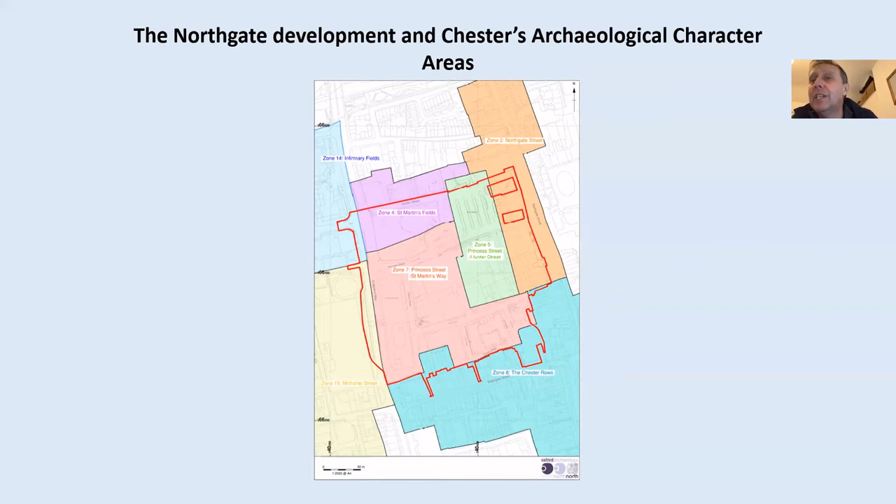They may not be scheduled, but planning guidance says that where you've got remains of national significance, there really is a need to treat them in the same way that you would as if they were scheduled. Okay, if that makes sense. So that's a justification, if you like, for the whole approach that we've taken of preservation in situ. Could we move on to the next slide, please?

Helpful, I think, to just remind ourselves of what we might be encountering in the area that was to be disturbed. Again, we're only just dealing with the northern area here. But thank you to Peter at the start for providing that summary of what had been found in the past with regard to work in the earlier part of the 20th century, and then Tim Strickland's investigations in the late 70s, early 80s on the site of the bus station.

We are, of course, looking at the Roman legionary fortress here, and we're to the north of the elliptical building, and you can see the barrack blocks in the western part of the area, and then in the eastern area, that probable stores building that was identified. So that's just a brief outline of the Roman picture.

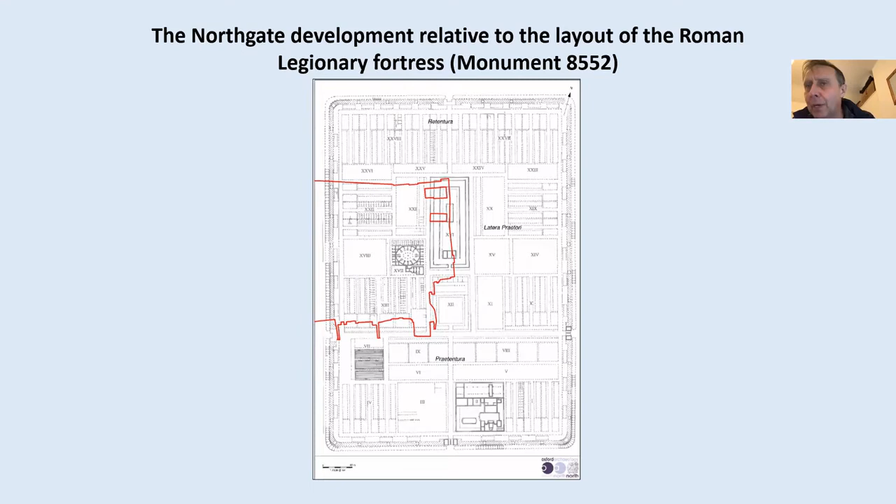If we move on to the next one, we shouldn't, of course, neglect the later periods, and we were alert to the possibility of early medieval finds, not least because of the discovery of the sunken featured building during the late 70s, early 80s excavations, published by Simon Ward in his volume. So that's the northern notation on that plan, basically. Next one, please.

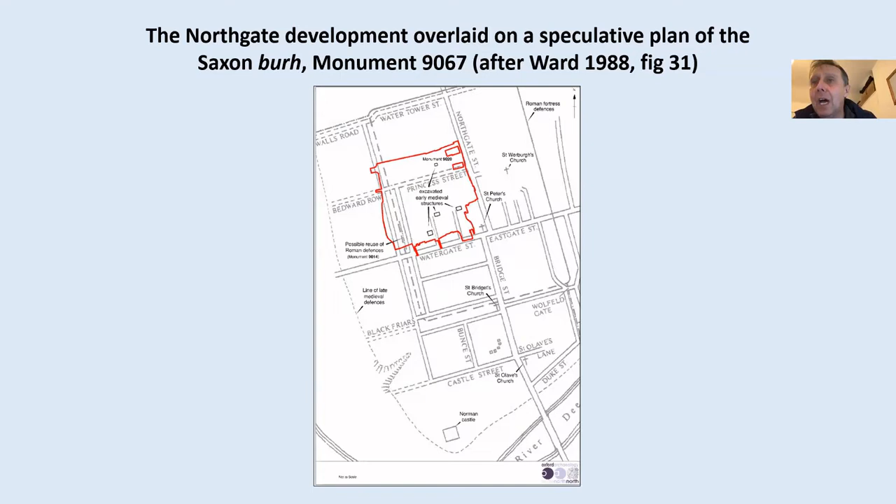Then again, with medieval Chester, the lanes, well, there's no Hunter Street at that time, but of course Parsons Lane, I think now Princess Street, Northgate, and what today is Nicholas Street are apparent. The area beyond that looks quite open, and I think that's reinforced by the next slide, please.

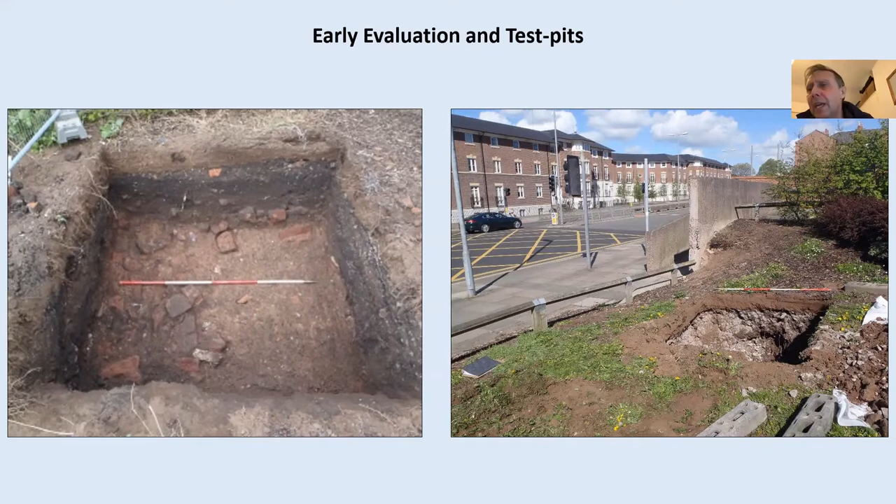So if we could move on to the next one, please. Okay, at this early stage, we also took advantage of the various geotechnical works that were carried out. So these weren't really formal evaluation trenches, although they were subject to close evaluation, close observation by the Oxford Archaeology staff. And these two slides illustrate the sort of thing that we were interested in.

So the one on the left with the ranging rod in it is a hole that I asked to be punched through the concrete floor or surface of the existing bus station. Because one of the questions that I had, coming new to the project, basically, because before I became development management archaeologist for CWaC, I hadn't dealt with Chester at all, really. And I had various questions that might or might not be, in retrospect, sensible or obvious to anybody with any knowledge of Chester.

But anyway, this one on the left made me quite unpopular with the contractors, because not only did they have to get through 500 mil of reinforced concrete, there was also this layer of aggregate underneath it. But what I was keen to understand there was what had been done at the conclusion of Tim Strickland's excavations. Had they taken a bulldozer to everything and just graded it all before putting in the bus station, or had they just covered it all in topsoil, in which case all those archaeological remains would remain, the stone walls anyway, the Roman buildings would probably be there, really.

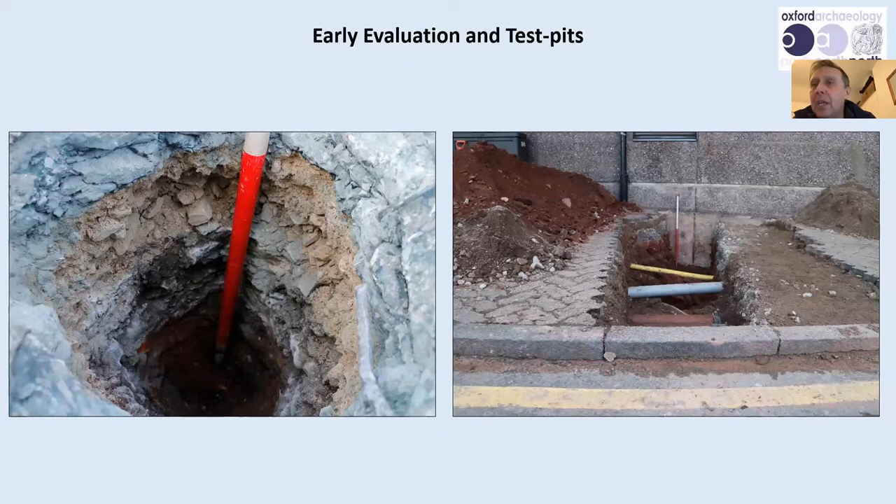Could we move on to the next one, please? And again, more test pit watching briefs, basically. I put the one in on the left because that was just a small trench, which didn't tell us a huge amount, but it actually officially marked the start of the Northgate development. So people may remember there was a bit of a press fanfare there, basically. But also, test pits were dug down Hunter Street.

Now, these were dug not because this part of Hunter Street was going to be massively disturbed by the development per se, but because it was going to be affected by the need to realign the services. And what we wanted to understand was the damage that those services were likely to do to the underlying archaeology, and if possible, to minimise it. The aim being, as we've eventually decided, and as we'll see shortly, to put as many of the services in one trench of restricted width and hopefully depth, so that we minimise the damage to the archaeology.

And I think that was a good and innovative thing to do, because, as I said earlier, this is permitted development which the utility companies can put in, but credit to the CWaC construction team in that they said, well, actually, we accept that it's because of this development that these services are going to go in. So we will include those as part of the mitigation, rather than just leaving it to a bolt-on at the end of the development.

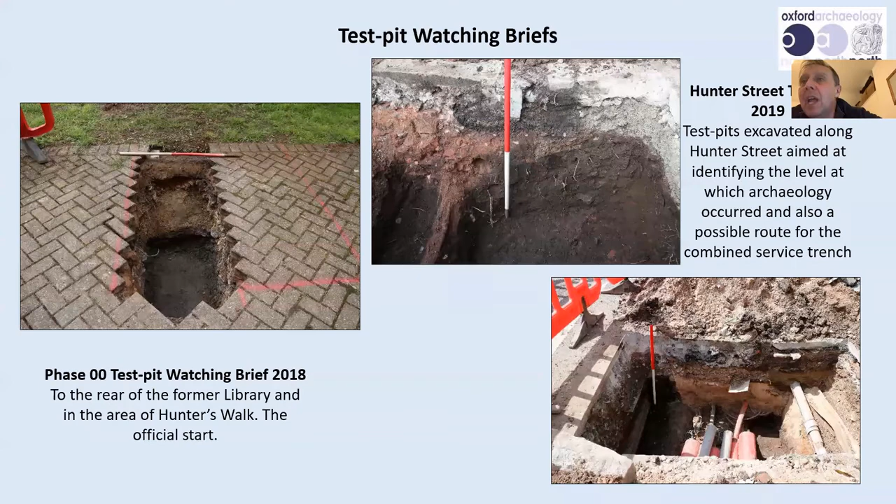Okay, so this picture is just to give you some idea of where trenching was done. So many of those green trenches, it certainly doesn't show all the geotechnical pits that we observed and everything, but this is the evaluation trenching, much of which was carried out specifically in connection with the latest iteration of the scheme. And as you can see, it's been quite extensive, really, although it's worth saying that the aim was to find the top of significant archaeology, which in this case tended to be the Roman collapse layer.

That's not to say that we would have ignored anything else. If we'd hit anything later, early medieval that had been well preserved, we would have stopped there, and the preservation in situ strategy would have had to take account of that. But in this instance, all of these trenches were cut to the top of significant archaeology, which tended to be the Roman demolition, or the natural in some instances where the archaeology tended not to survive, or where there had been significant recent damage to the archaeology. So quite an extensive area.

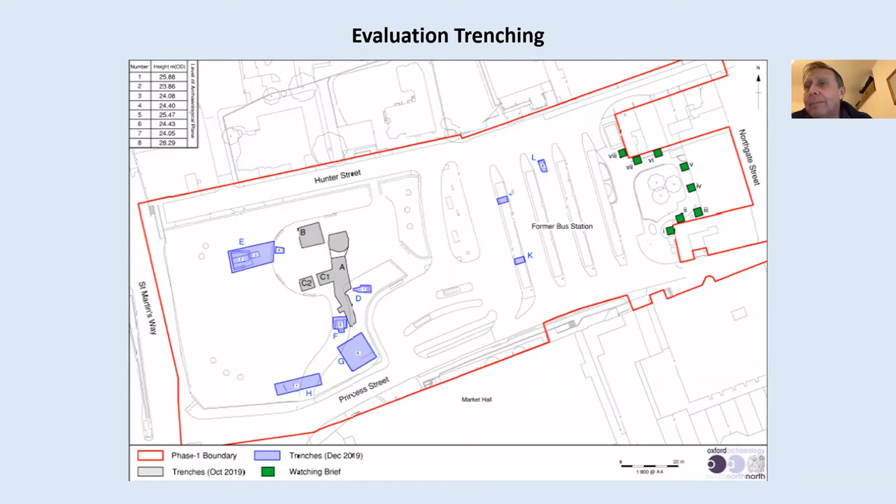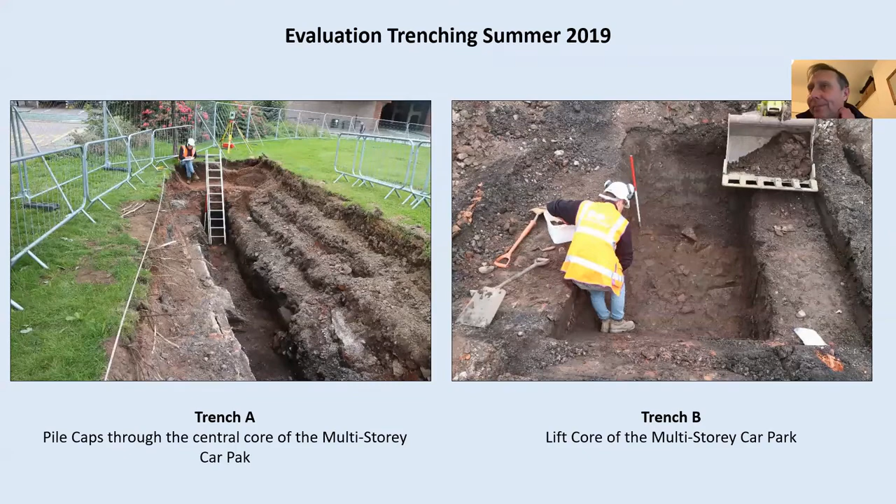Okay, so again, more trenching. Trench A is a further one for another array of pile caps, towards the west end of Princess Street. Lots and lots of services, and in this area it's all quite difficult, collapsing stuff, because we're dealing with backfilled cellars here from the 18th, 19th century buildings that formerly lined the north side of Princess Street.

Interestingly, the other trench, a bigger trench that was opened up within the car park area, sorry, the bus station area. You can see that dreadful reinforced concrete they had to get through and the aggregate underneath, then the deep brown soil, and then again a wall on the right-hand side, which we think is of Roman date.

That was really conclusive proof that at the conclusion of the excavations in 1979-80 on the bus station, they didn't, fortunately, bulldoze the site. They just covered it all over with aggregate. We assume that what was there at the end of the excavation survives beneath what was the bus station surface. And I'm pleased to say it pretty well all survives today.

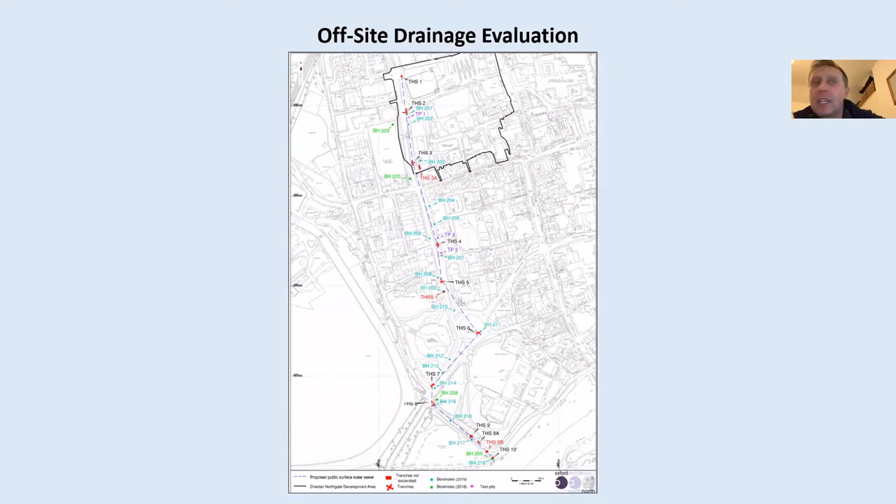As part of that off-site drainage, which again we need to remember is permitted development, we did some evaluation trenches in the Hunter Street area and elsewhere along its line, just to see what we were likely to encounter. At the west end of Hunter Street, you can see this red area just under the modern tarmac. We were particularly interested in that because there had been suggestions in the past that that might be a Roman surface, very close to the surface.

But we were able to demonstrate conclusively that that wasn't the case, because that brown soil underneath it had post-medieval pottery in it. Having said that, it was clear that archaeology would be disturbed by the feeder trench for the main drain, which was going to run down Hunter Street. As you can see, these trenches did reveal some archaeology.

But anyway, if we could move on to the next slide, please.

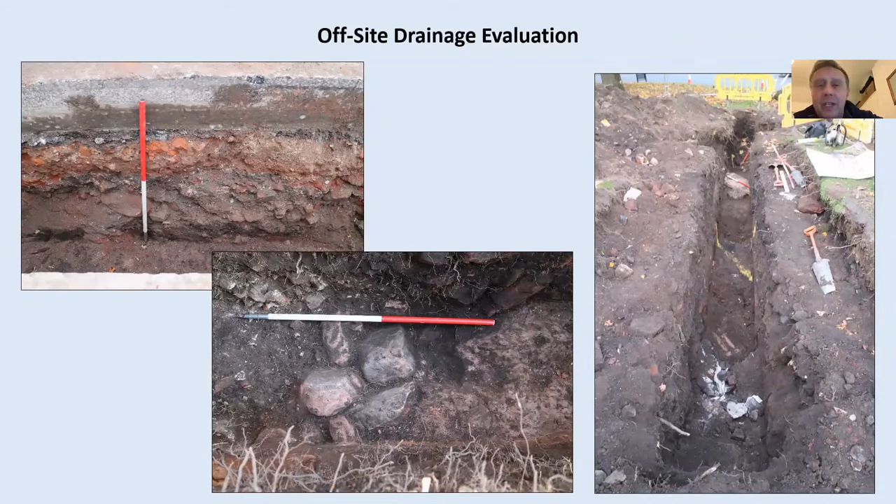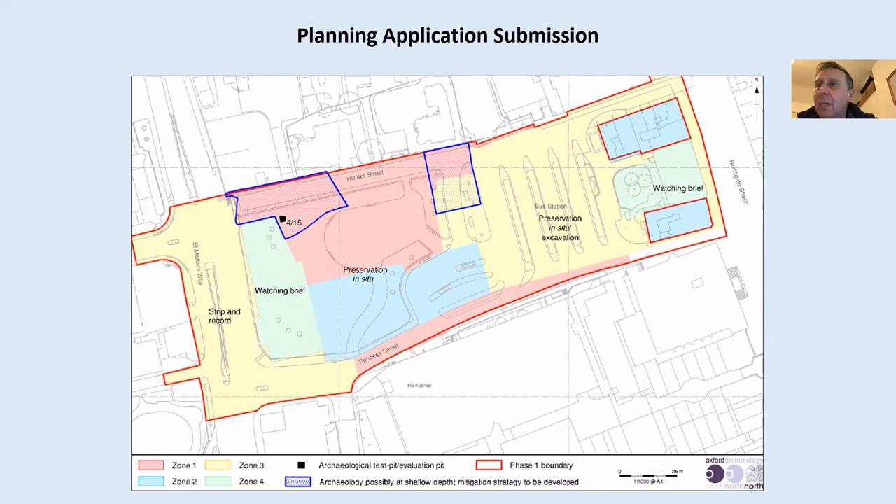We would then demonstrate that largely the concrete floors and underbase of the new development would be raised above that significant archaeology, except in a few places, such as I've mentioned before, where we had lift shafts or particularly deep piling arrays.

The calculations were done on that basis to show we couldn't quite get to 3%. Well, we didn't think we were going to get to 3%. As it turned out, we did manage to, but the projected loss of significant archaeology came in at 3.9%, which I think was pretty good, really, given the difficulties and constraints of putting this together.

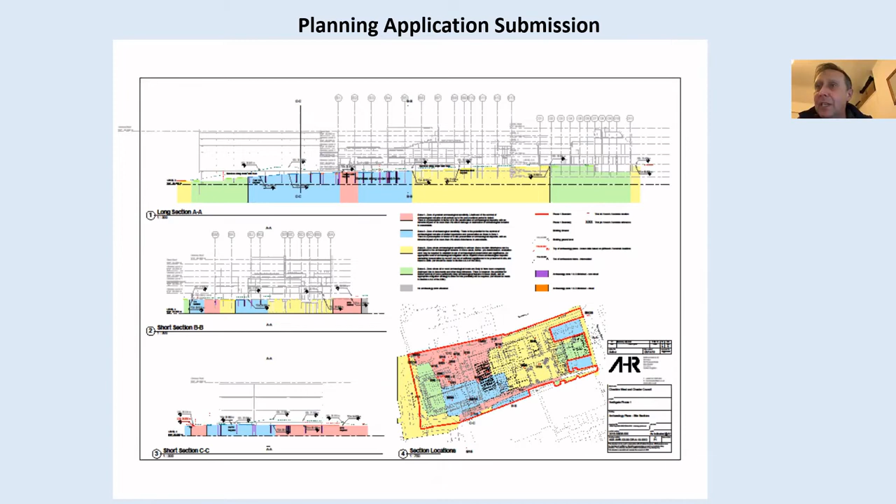In addition, Oxford Archaeology North, as the contractor, submitted generic written schemes of investigation, project designs for the different techniques, the written schemes for archaeological mitigation, watching briefs, strip and record, and archaeological excavation. So everybody knew not just where we were going to do these things, but how we were going to do them.

And also these things were all tied up when the planning application was determined. We weren't leaving this to be sorted out post-determination. The sensitivity of the archaeological deposits on the site was just so great that we didn't feel we could take that risk. It all had to be tied up and conditioned so that we all knew where we stood, and everything was backed up by stringent archaeological conditions.

And what we did is we met at two weekly intervals with Oxford Archaeology, the construction team, Vinci, and various other people to review how we were doing and to adjust the total loss of significant archaeology.

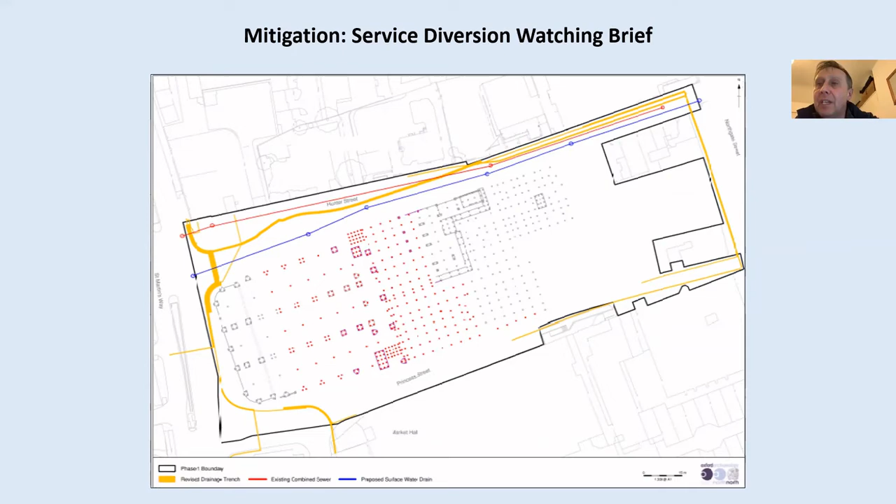The mitigation service diversion watching brief, this was where we were going to have the biggest impact. We recognised that as we went down Hunter Street. They made the trench narrower than they normally would, and we tried to plan it in such a way that it didn't unnecessarily go through archaeology. But there was some impact, as we will see. So if we just move to the next slide, please.

Some areas we only needed a watching brief. At the east end of Hunter Street, just outside the cinema, the area is massively cut about by services, but there were Roman deposits remaining, and those were plotted, and they seemed to tie in with the stores building that was excavated by Tim Strickland. So that all added to the picture. That archaeology wasn't actually much more destroyed, to be quite honest. That was the level at which they were working to.

At the western end of Hunter Street, there was some archaeology. You can see some tumble here, but that seemed to lie pretty well directly on natural, and there wasn't any huge disturbance.

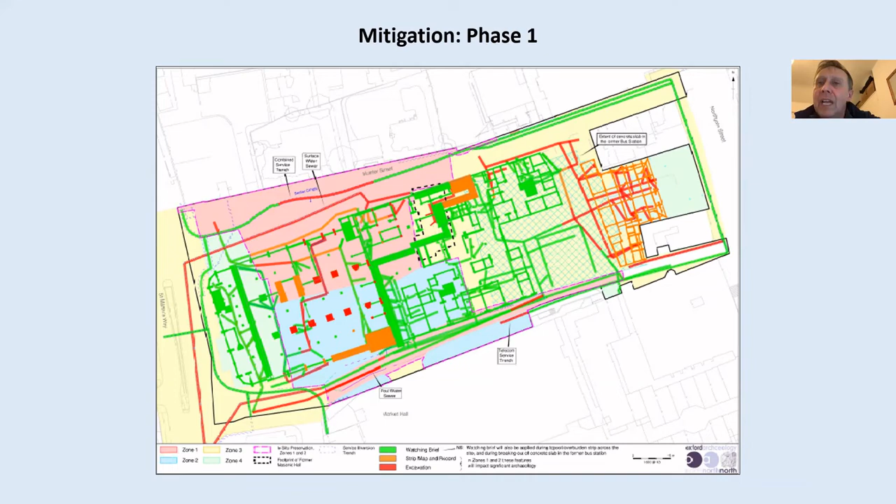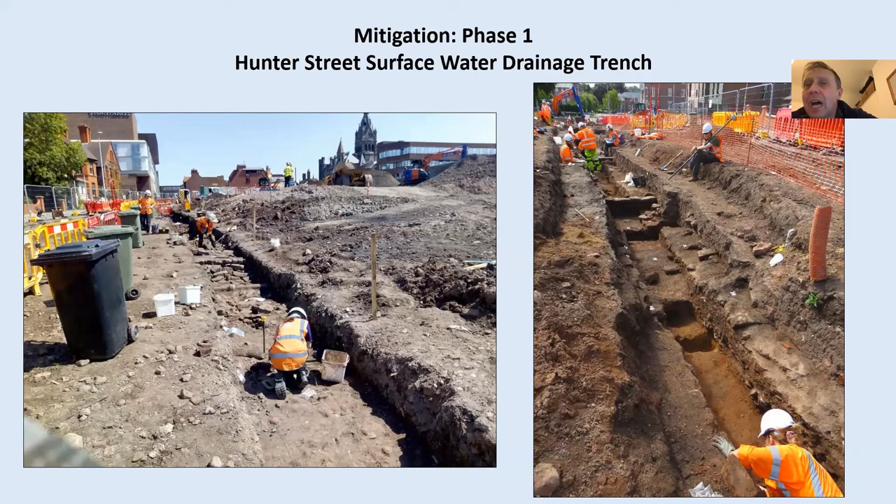But certainly as you go further down, you are seeing definitely Roman walls. And of course, we are in the area of the barrack blocks here, and it seems clear that that's what we're dealing with, even if you can't hope to interpret everything on the basis of just what is a narrow slit trench, really. Moving on to the next slide, these are some of the more spectacular finds in the trench.

On the left we can see concrete flooring of the barrack blocks with further surfaces underneath and walling with wall plaster on it. In the right-hand slide, we've got clamps on the right-hand side, but there we've got also wall plaster in situ against the stone walls. That's about 50 centimeters high - blue wall plaster paint, apparently.

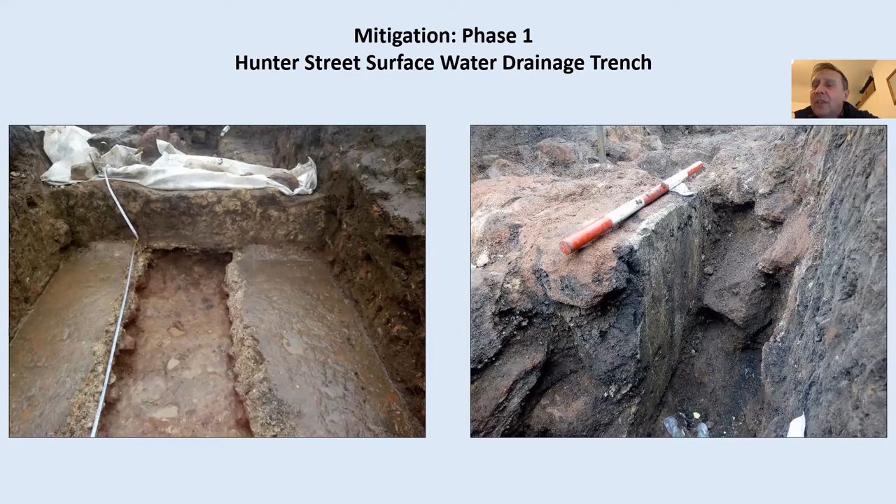I'm pleased to say that they were able to remove that in a block and conserve it, despite the very difficult conditions - it was removed without it all falling apart. Some good archaeology there. Okay, it's keyhole stuff, but I think this is one of the things that will be in the report that comes out of it - we'll be able to plot these locations and see how they fit in with the plans that exist already for the layout of the barrack blocks in this part of Chester.

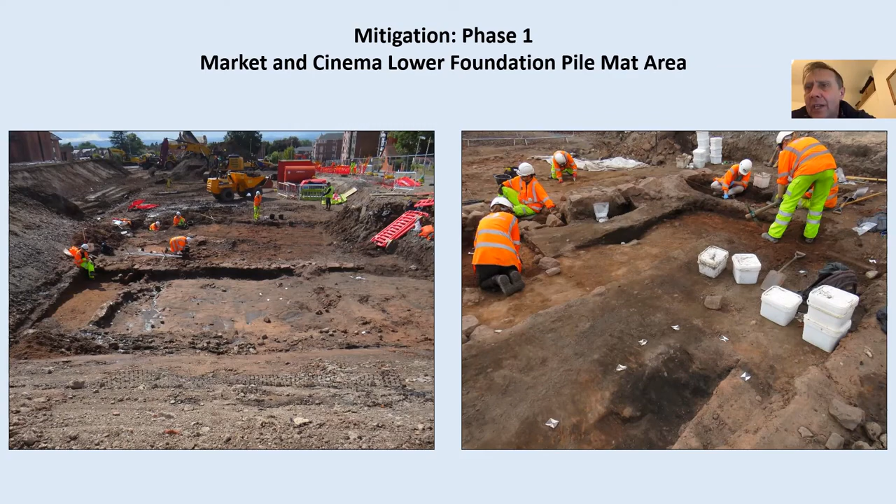Next slide, please. I just put these in to show that it was within the context of this ongoing development work that much of the archaeological mitigation occurred. The archaeologists were working amidst all this, well, it seems like chaos. It isn't—it's all well-planned development. But crucially, the archaeology was keyed into this. At various stages, the archaeologists would move on to do a specific piece of work, just like any other subcontractor within the development team. I think it was that close cooperation and integration of the archaeological team that allowed things to work so well.

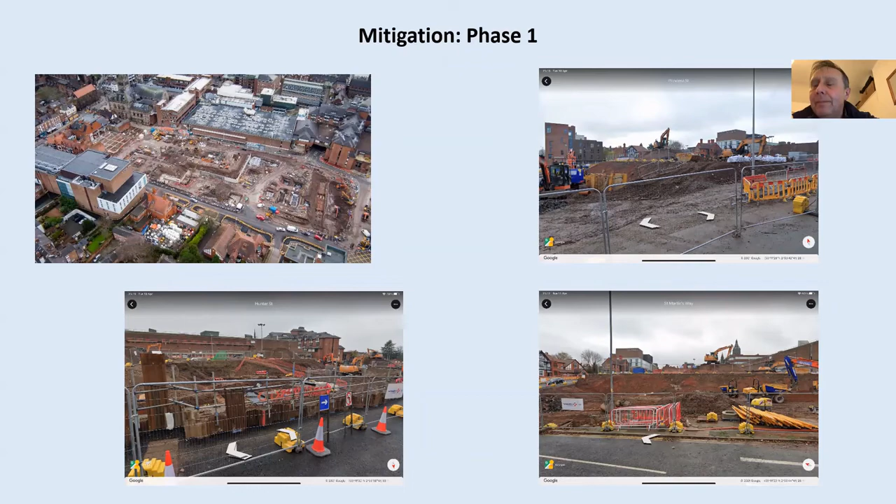So next slide, please. Here we see some of the piling arrays. So the piles have gone in here and areas are being excavated in order to accommodate the pile caps. In most instances you can see they've removed the overburden, the black topsoil, and in some instances they're down onto archaeological surfaces.

There was some minimal disturbance in some areas, but the idea was that terram and sand would be laid down, and the concrete pile caps laid over the top of that, thus not causing any more damage to the archaeology than was caused by the pile caps themselves. These are areas where particularly important supports for the development were to be put in, and these are areas that we saw evaluated previously.

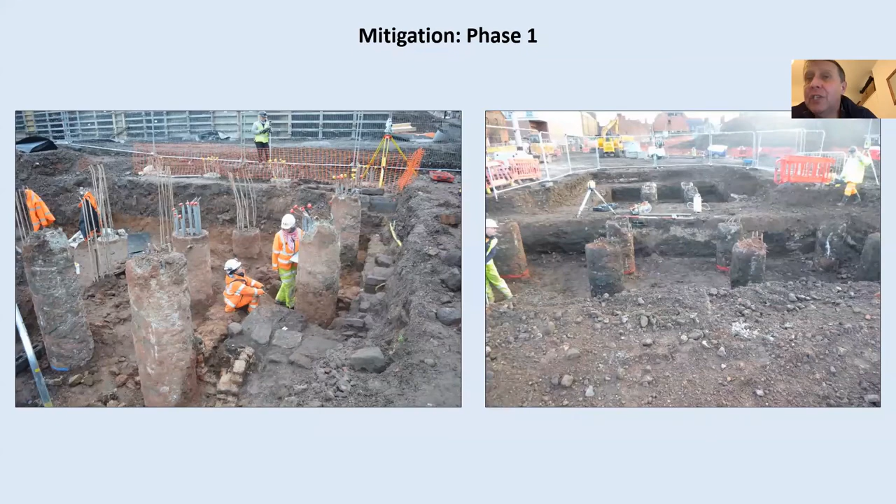Next slide, please. So more slides showing piles, and again, obviously there's archaeological surfaces exposed here. I just ask you to notice that the piles are in, but they have done minimal damage to the surrounding archaeology. People often say, well, surely the piles are going to completely wreck the surrounding archaeology, and some versions of piles would do that. But these ones are what they call CFA piles, continuous flight auger, where they drill the hole, take the arisings out, and at the same time pump the concrete in. That does seem to do minimal damage to the archaeology.

So I think it's useful to be able to demonstrate that. Next one, please.

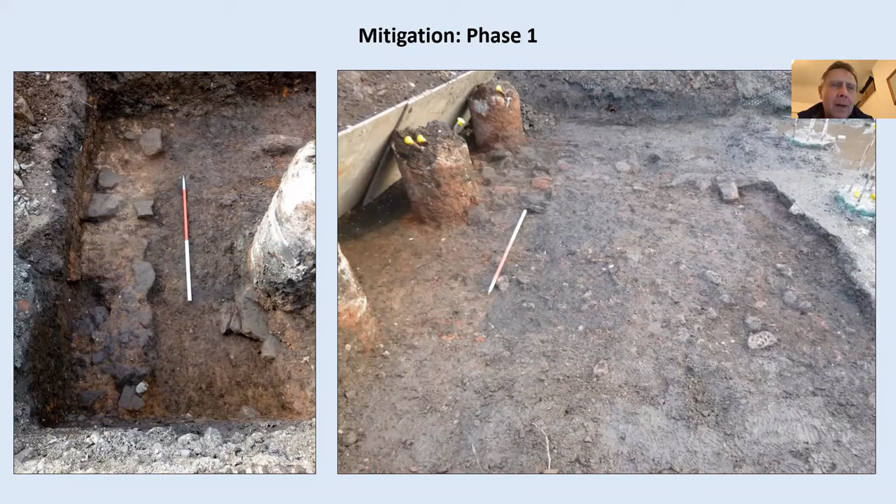Just very quickly, the offsite drainage. Here are some slides of the access pits that were dug. This one on the left shows very little significant archaeology exposed. The one on the left is on Nicholas Street and shows the cellars of some of the 18th century, 19th century buildings that would have formerly lined the narrower Nicholas Street. No evidence of anything earlier than that.

The one on the right is the one at the HQ roundabout, carefully sited to avoid the post-medieval graveyard of St. Bridget's. But despite that, there was a huge great hole there full of post-medieval pottery, which we hadn't really expected because it's too far north to be the castle ditch. We're not quite sure what it is—it may be some sort of unrecorded quarrying or something like that, really.

But post-medieval pottery all the way to the bottom. Should also say that the trench was drilled underneath the city wall and didn't do any damage to the city wall, I'm pleased to say.

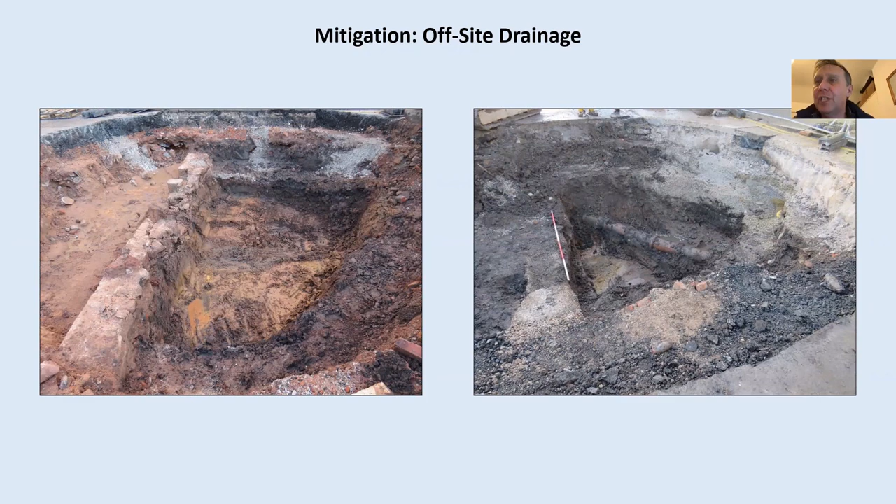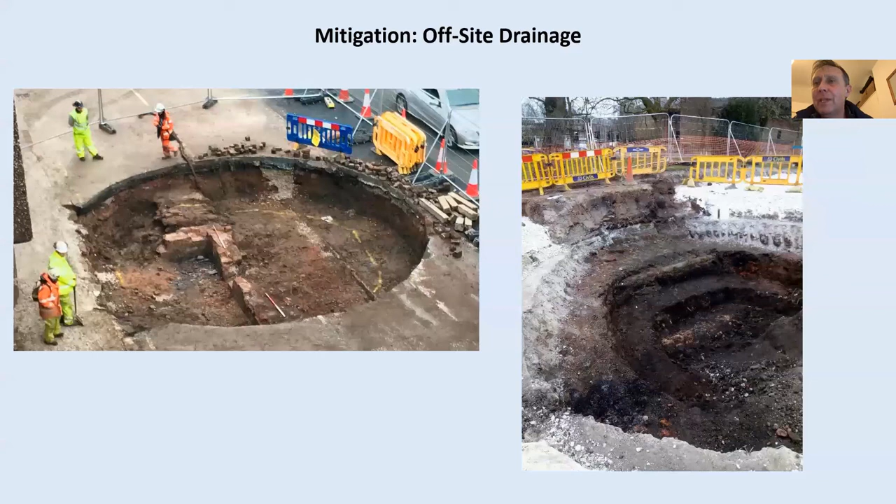And I think, fine, just next slides, just to close. Yeah, just some more slides of the access pits. It's all a bit Quatermass and the Pit, isn't it, really? But there you go.